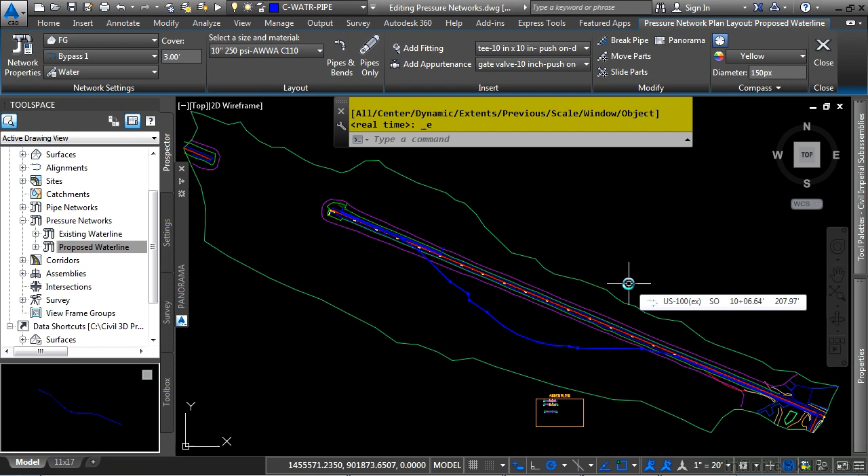Civil 3D provides many ways to edit pressure network objects. Let's go ahead and examine this functionality by zooming into the location where our existing network ties into our proposed network.

The first thing you always do to edit any of your parts is to simply select them. You'll notice a couple of things happen here. First, we have the grips. If you hover over any of these grips, you can edit the different parts.

I can edit the deflection angle. If I hover over this grip, this is the location angle. If I hover over this grip, I can continue the layout. And this one here will lengthen the pipe object.

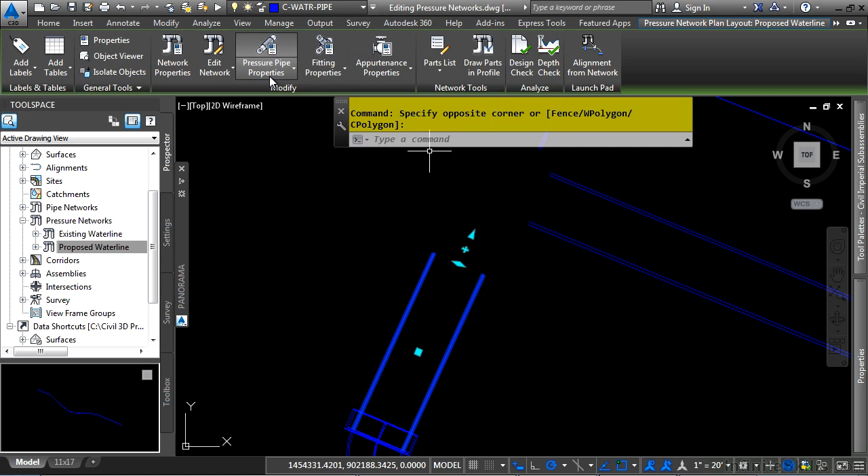Also notice the Pressure Network Contextual tab, which allows me to modify as well as analyze the different parts of the pressure network. In this case, we want to tie the existing network into this location. I'll go to the Modify panel, Edit Network dropdown, and select the Plan Layout Tools.

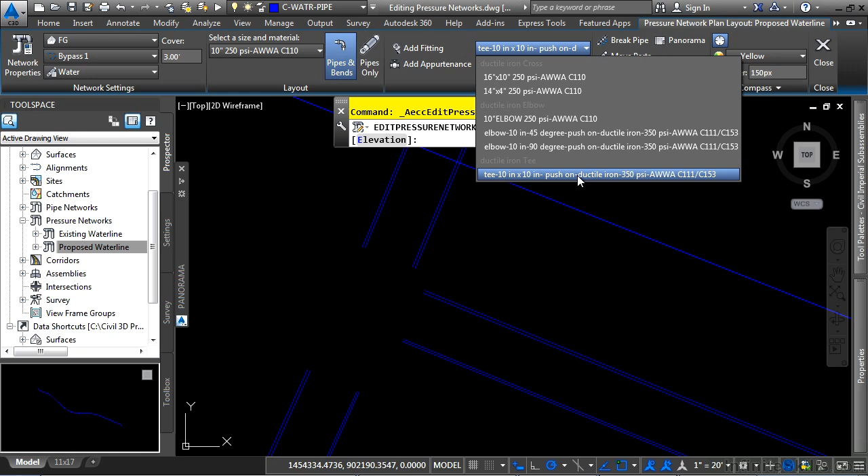So what we need is a T connection. If we look at our Insert panel, I'll click on my parts list. You'll notice I have a T connection I can select from. I'll go ahead and click on Add Fitting.

Notice the command line window tells us to specify a placement point for the fitting. I'll go ahead and pick this location here, and there's my first location for the T-fitting.

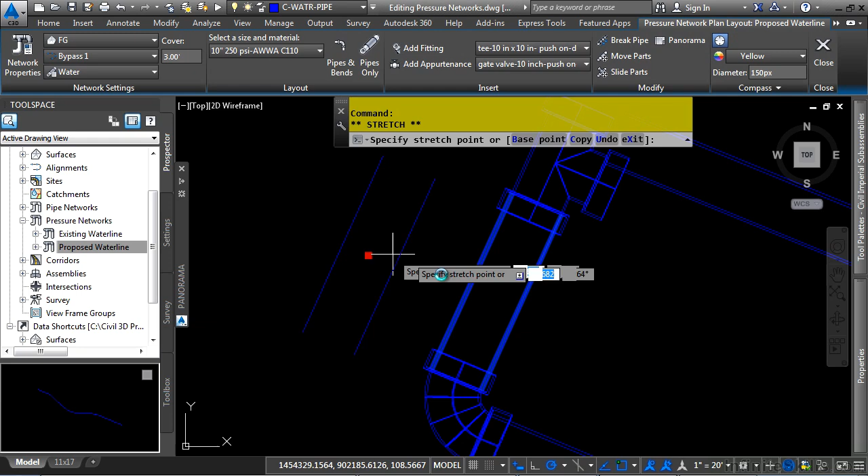Press Escape. Now notice that when I select this object, I can't actually change the different grips I had before. That's because it's connected to the fitting. I can't change the location, as that would break the connection to the fittings.

So now what I want to do is select the T connection here. Notice how you get a bunch of grips that you can do all kinds of things with. You can flip them - these are very similar to the dynamic grips you would define with dynamic blocks.

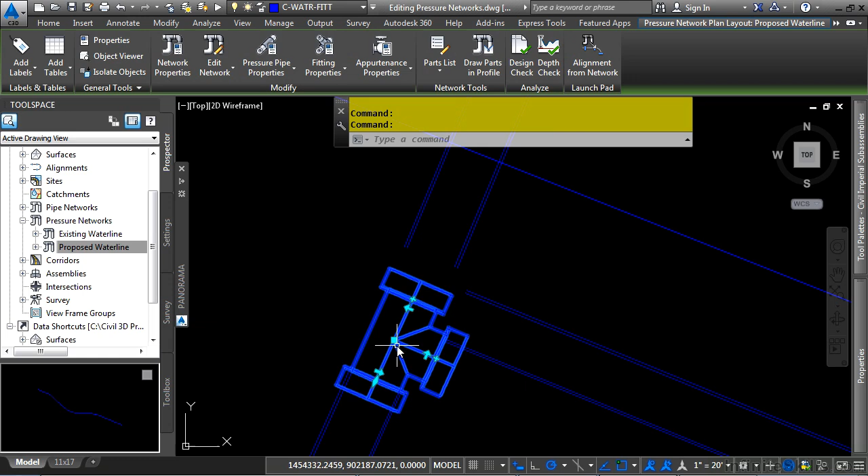I can also continue the layout here, or I can move the location of this to this location here. So I can just snap right there. Notice how it extended that pipe automatically.

I'll press Escape, and then what I can also do is select this one here and pick my lengthen part. Notice how when I hover over this, it actually connects it to that fitting. It's a fantastic feature of Civil 3D and pressure networks.

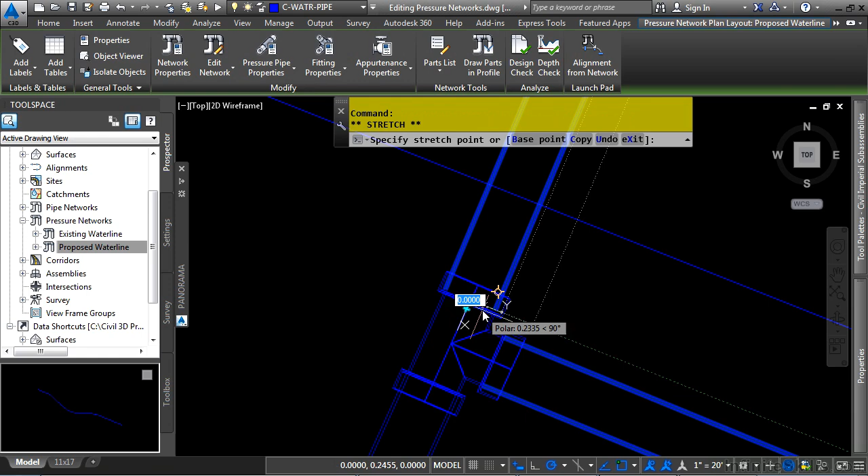So let me go ahead and select all these pieces to verify that. We'll take them into the object viewer. There you have it - they're all connected very nicely into the fitting.

Some of the other things you can do is, of course, select your pipe or fitting, and then go to its specific properties. You can change the style. You have some limited functionality as far as changing elevations, northing and eastings, and so on, but notice how you cannot change the type of pipe that it was.

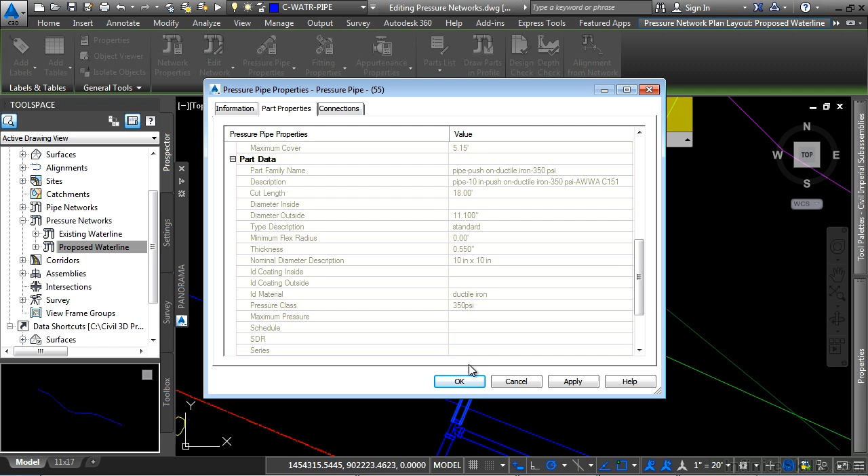To do so, you would simply select it and delete it, and then redraw that part using the Plan Layout Tools. You can also navigate to your pressure network, expand it, and then select the different categories that you want.

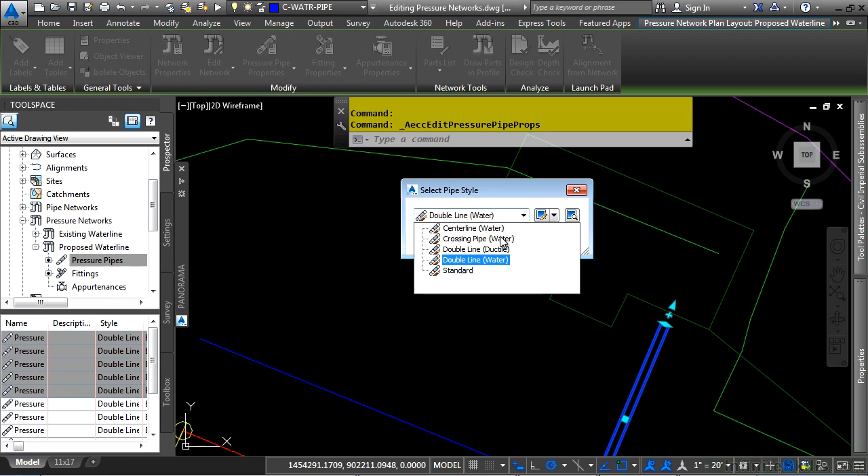I can, of course, select a few of these. Let's say I wanted to change the style of these objects - you could simply do so globally by right-clicking on the column header and selecting Edit, and then change the style for those specific entities.

Again, you're a little limited to what you can do as far as the size of the pipe and so on within here. Also, right-click on the actual network collection and go to Pressure Network Properties, and you will have the ability to change the default layout settings for creating new pipes, fittings, and appurtenances. You can also define the default labels that apply to the profile and section view.

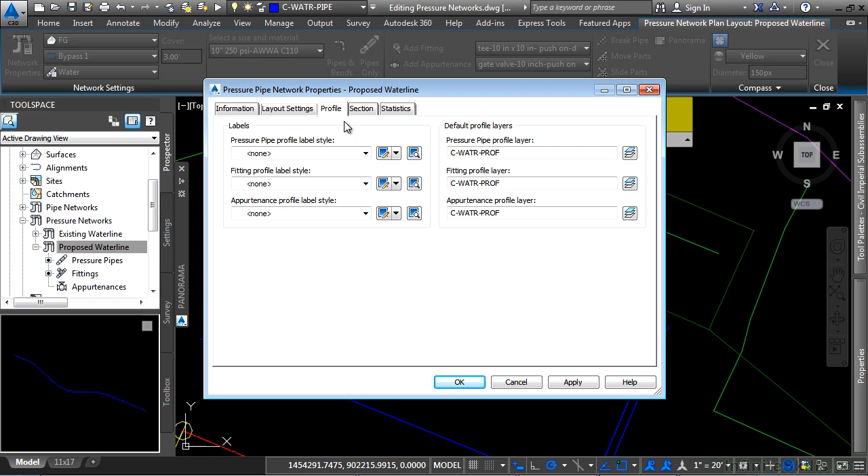Notice some of the other options to break apart pipes, move parts, slide parts, and so on. Many of these can be done with the grip editing functionality as well.